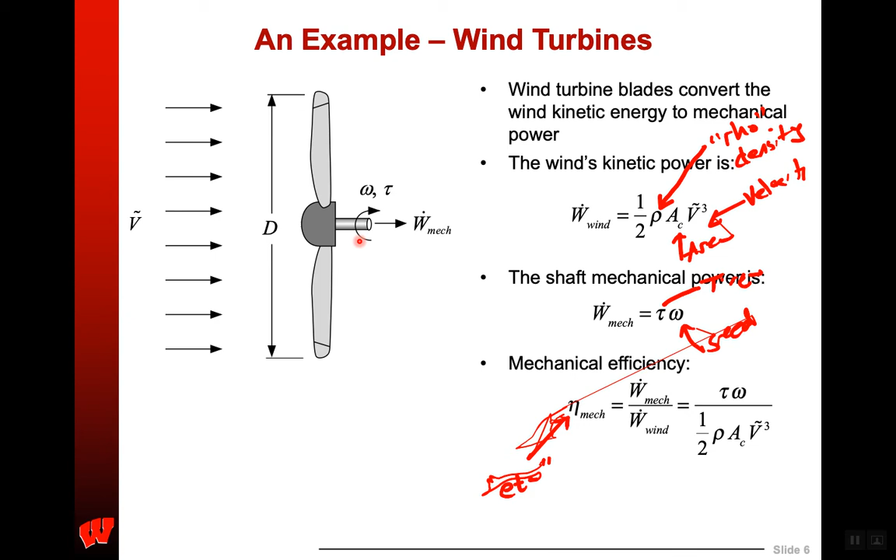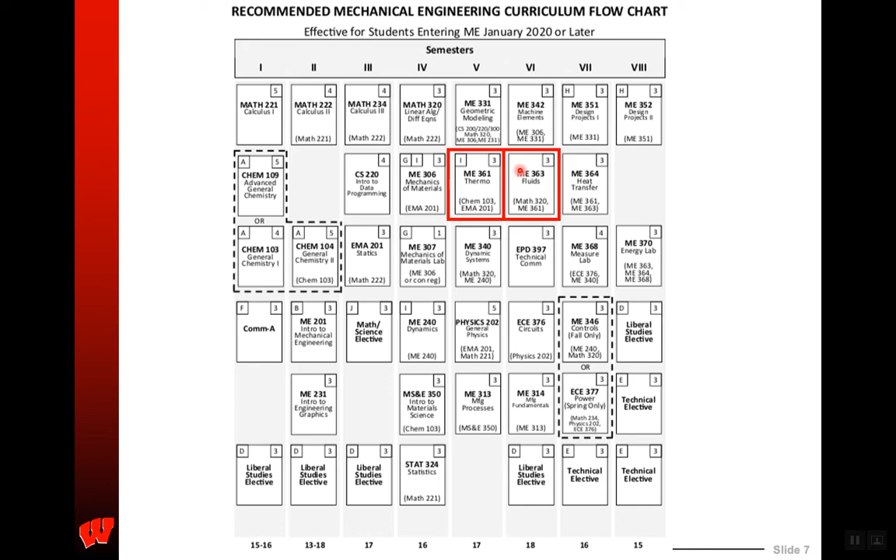You'll learn much more about efficiencies in thermodynamics. A lot of people think thermodynamics is all about hot things and temperatures. Really, thermodynamics is how energy changes shape. It starts out as kinetic energy, and then we turn it into shaft power. The energy goes from a flow power to a shaft power, and what happens in between is a big part of thermodynamics. How does it work in a wind turbine? You'll learn about that in ME 363 on fluid mechanics, which I will very biasedly say is one of the coolest classes we teach here.

A very important thing about wind turbines and where you build them is how much energy is available. In the wind turbine world, they call that the resource. How much energy is in the air that we can try to extract? That depends very much on the wind speed. So here I've got a plot. I took an anemometer, the thing that measures wind speed or airspeed, and took a whole bunch of measurements in meters per second over 0.2 of a second. So this is a very fast measurement.

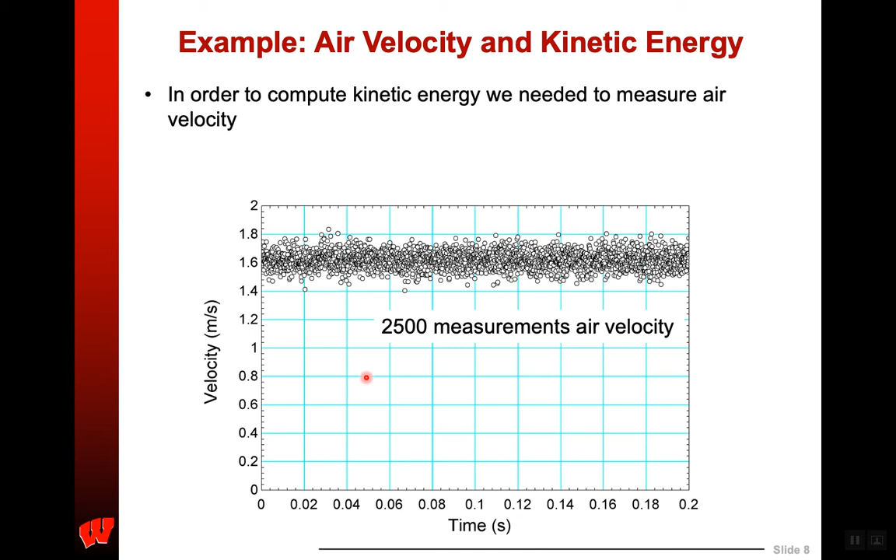And here I've got all these data. It looks like about 1.6 meters per second. But notice these are 2,500 measurements, so I must have hooked this up to an oscilloscope or something. So here's 2,500 measurements over 0.2 seconds, and I got lots of different values. So if I said, what's the wind speed? Maybe it's not so easy to answer.

So we have to talk about accuracy and precision, right? The measured value fluctuates, right? There's some high velocities, some low velocities. Is that because the wind is fluctuating? Is that because the instrument is fluctuating? What's up with that, right?

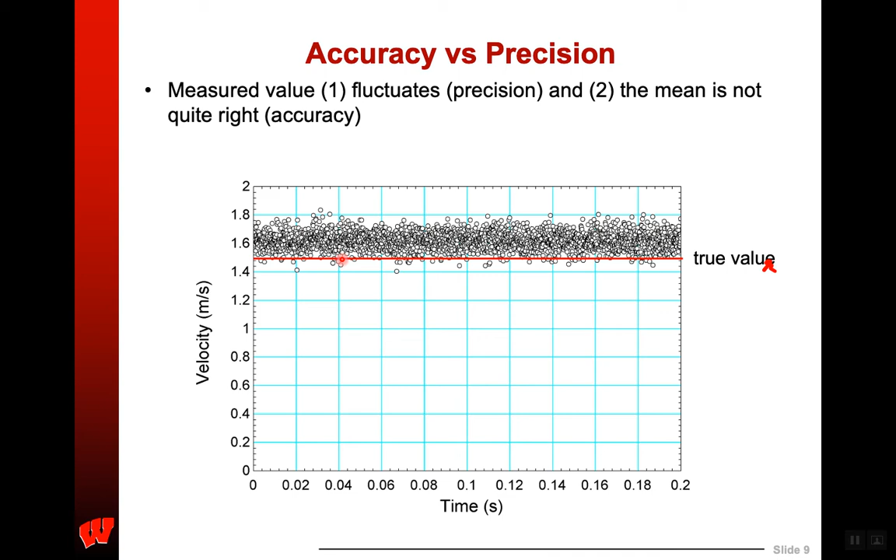And two, the mean is not quite right, right? Let's say that I knew, like with some magical certainty, that the wind speed is actually 1.5. But all my measurements were up here, right? So precision is how tight is my grouping of measurements, and then my accuracy is how close to the actual value is it, right? So those are two important things when we make measurements, accuracy and precision.

So here's an example of some data that are accurate, and data is a plural, one datum, two data, so you should say the data are very accurate, right? It appears that the center line of my data lines up perfectly with the true value, which I know to be 1.5. So we would say this is accurate, but holy cow, my measurements are all over the place.

I have some measurements that are down here well below 1, and I've got some measurements that are way up here by 2, right? So a really wide range of measurements, but the mean of these data falls right on top of what I know to be the true value. So this would be an accurate measurement, but it's not very precise.

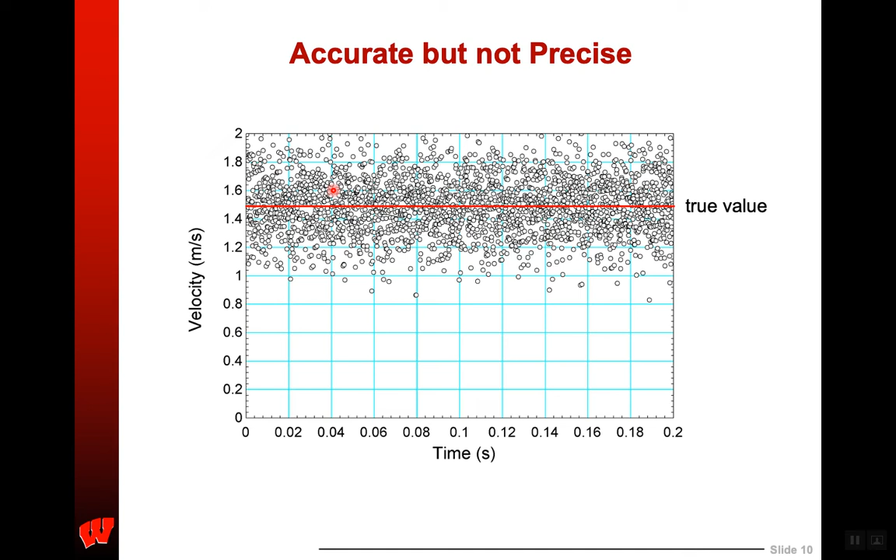Accurate but not precise, precise but not accurate. Many of you have seen this in a science class, so this is review. If you haven't, there you go.

All right, accuracy: whenever you have an instrument, thermometer, anemometer, accelerometer, something that measures something else, you always want to know how accurate it is. And that's like in the fine print. I was like, oh, sweet, I got a thermometer, right? I'll get this one because it's cheaper, or this one because it's smaller. Well, that usually comes at a cost, and the accuracy is almost always published, at least for good stuff.

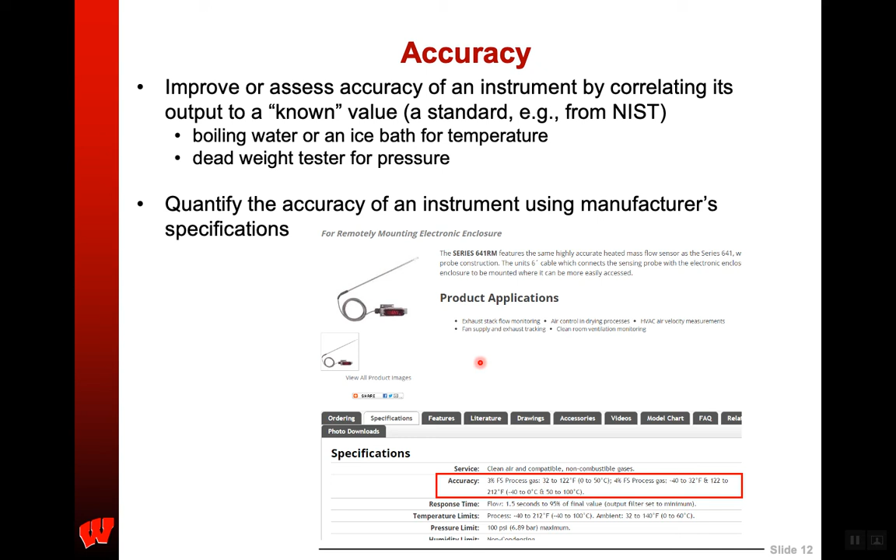The accuracy is published by the manufacturer. They have to say how accurately do you know the measurement? How confidently do you know that temperature? So there you go.

And in a lot of circumstances, that's fine, right? I know my uncertainty here is on the order of 0.2 meters per second, 0.1 meters per second, something like that, right? I don't know this to 0.00016 meters per second. Likewise, I know it better than plus or minus 2, right? It's roughly plus or minus 0.1 or 0.2. So eyeballing it, totally okay in many situations.

A little better way to do this is to look at the distribution, right? If I took all these measurements here and I binned them, I said, how many times did I get a 1.65, right? And I put those in a box. I'm like, okay, yeah, I got a lot of them. How many times did I get a 1.60? All right, well, I got a bunch of those, a bunch of 1.68s. So I get a whole bunch in the middle, right, that are right around 1.61 or 1.62.

I get some that are a little bit more, a little bit less than that. And then there's a few that are way out there, right? These are the tail ends of it here, okay? And notice it makes this very interesting shape here that looks like a hump or a bell or something like that. Sure enough, this is a bell curve or a normal probability distribution. Right, that's the word normal. I'm not sure where that comes from, but it's called normal.

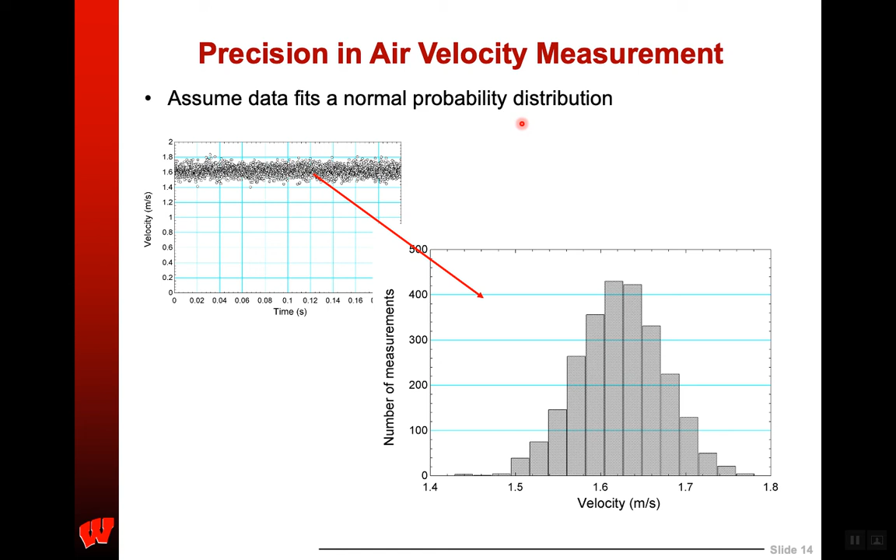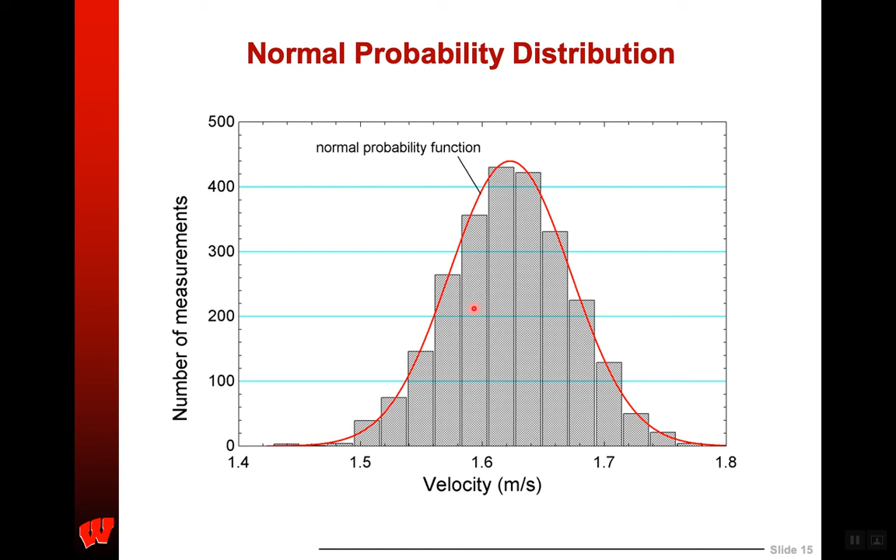We can fit that. There's a really slick little equation that makes this curve. And we discover that many, many things in nature are distributed normally, right? The levels of chemicals in your blood, the hours of sunlight on a given day, or the masses or the dimensions of parts when they come out of the factory are oftentimes normally distributed. There are some variations on the same theme, but many things, the heights of students in a classroom, the weights of students in a classroom, whatever, right? Many natural things are defined by this normal probability function.

And surprise, surprise, the Germans make Porsches and BMWs, and we don't, right? Now, to be fair, American cars have come a long way in the last 20 years, such that American cars are probably now as reliable as German cars, maybe even more so. And companies like Volkswagen have had their problems. But anyway, I thought it's interesting that the Germans put math formulas on their money and we put floating eyeballs.

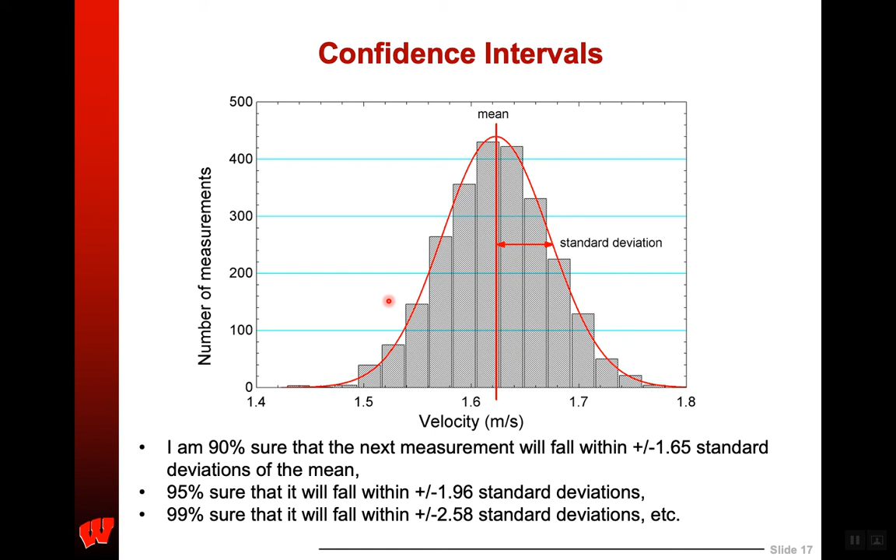People who aren't mathematicians, engineers, scientists, they want to be sure. Well, what's the value? Is global warming caused by people or not? Well, no good scientist will ever say absolutely yes. They'll say, I'm 90% sure that it is. I'm 95% sure. I'm 99% sure. Or maybe I'm only 30% sure that it is. A good scientist never talks about absolutes. They always talk about confidence intervals. What's our confidence in the measurement? What's our confidence in the prediction? So really, really important stuff.

So how do we actually do this? Again, say we're trying to find the power. Actually, you know what? I'm going to stop here. I'm going to make the next one a new video.